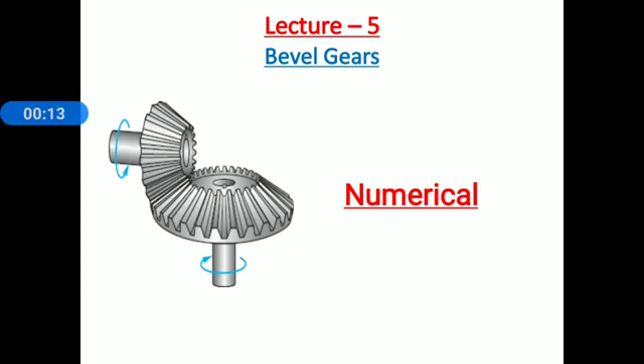This is the fifth lecture on bevel gears. In this lecture, we solve numericals. Let me start. This is the problem statement. Everyone carefully read this problem statement and try to collect given data.

A pair of bevel gears with 20-degree pressure angle consists of a 20 teeth pinion meshing with a 30 teeth gear. The module is 4 mm while the face width is 20 mm. The material for the pinion and gear is steel 50C4, SUT 660 Newton per millimeter square.

The gears are machined to meet the specification of grade 8 and the surface hardness is 400 BHN. The pinion rotates at 500 rpm and receives power from the electric motor. The starting torque of the motor is 150% of the rated torque. Assuming a minimum factor of safety as 2, determine the rated power that the gear can transmit.

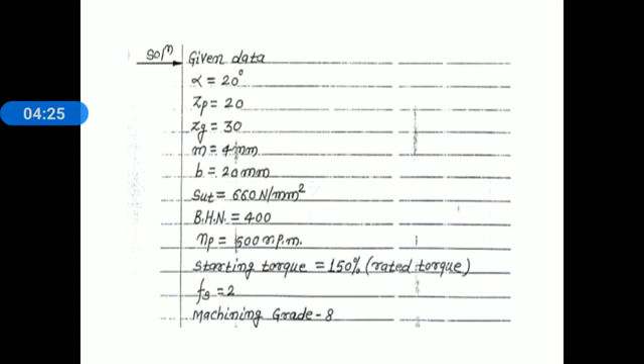When we solve a problem on a spur, helical and bevel gear, the first step is deciding the weaker between pinion and gear. If the material is the same for pinion and gear, the pinion should be weaker, and if the materials are different, we take the product of bending stress and Lewis form factor for pinion and gear, and the lower value is considered as weaker.

In this case both pinion and gear are made of steel 50C4. The material is the same, therefore the pinion should be weaker. After deciding the weaker, in step one we do the raw calculation needed in the next step. We find the pitch angle gamma for the pinion: tan gamma is equal to Zp divided by Zg, 20 divided by 30. Taking tan inverse of this ratio, gamma is equal to 33.69 degree.

Virtual number of teeth on pinion. The relation for virtual number of teeth on a bevel gear is Z' = Z / cos gamma. Applied to the pinion, Z'p = Zp / cos gamma. Substituting, 20 divided by cos 33.69, and we get a virtual number of teeth of 24.0369. Now we need to find the Lewis form factor for virtual number of teeth.

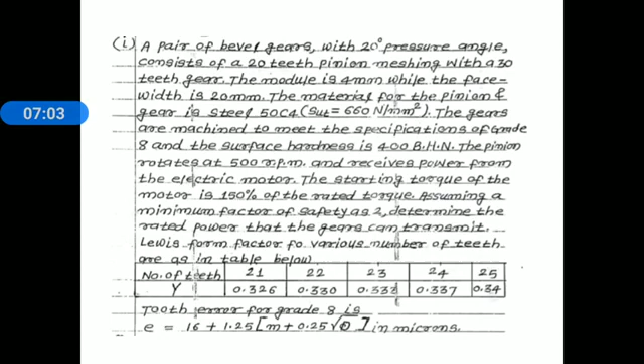Now here we do the interpolation to get the Lewis form factor for virtual number of teeth 24.0369. Y is equal to y1 plus (y2 minus y1) into (x minus x1) divided by (x2 minus x1). Now substitute the values. y1 0.337 plus y2 minus y1, y2 0.34 minus 0.337, into x minus x1, x 24.0369 minus 24, 24 is the value of x1, whole divided by x2 minus x1. x2 is 25 minus x1, 24.

Simplify that and we get a value of virtual number of teeth. Sorry, we get a value of Lewis form factor for virtual number of teeth. Y is equal to 0.33711.

Bending stress sigma b. We know how to find out the bending stress. Sigma b is equal to SUT by 3. We know the value of SUT, 660 divided by 3, and we get a bending stress of 220 Newton per millimeter square. After that, pitch circle diameter of pinion and gear.

Pitch circle diameter of bevel pinion, capital D suffix p is equal to m into Z suffix p. m 4 into Zp 20. We get a pitch circle diameter for bevel pinion of 80 millimeter. Similarly, pitch circle diameter of bevel gear capital D suffix G is equal to m into Z suffix G, 4 into 30, and we get the pitch circle diameter of bevel gear capital D suffix G is equal to 120 millimeter.

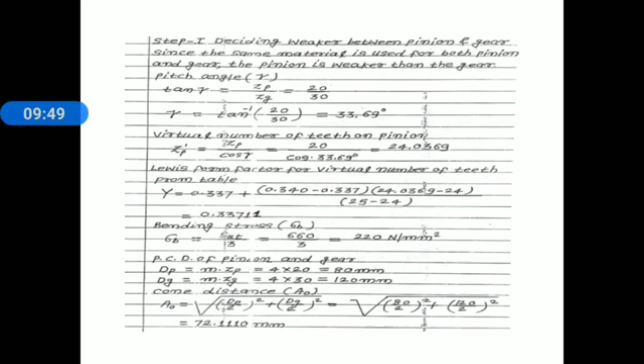Okay, now here we find out the power. For finding the power, we decide the criteria, either bending stress or wear stress. That's why we need to find out the bending strength and wear strength. Now the next step is step number second, beam strength, SB. We know the relation for bending strength in case of a bevel gear.

SB is equal to m b sigma b into Y into, inside the bracket, 1 minus b divided by AO. We know all the values, substitute all these values in that relation, and we get the beam strength. Module m 4 into face width 20 into 220 into 0.33711 into, inside the bracket, 1 minus 20 divided by 72.1110. Simplify that and we get a value of bending strength. SB is equal to 4287.5795 Newton.

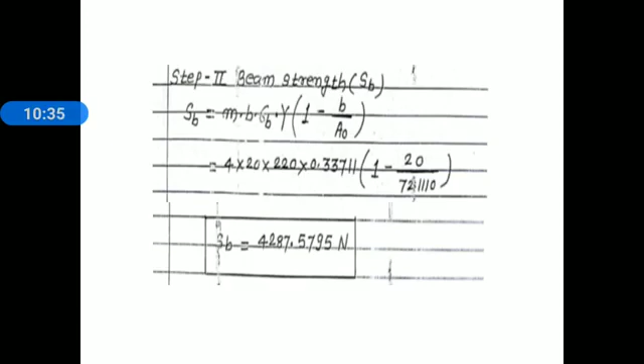Step number third, wear strength. We know the relation for wear strength in case of a bevel gear. SW is equal to 0.75 b Q capital D suffix P into K divided by cos gamma. Okay, now here in that relation only two terms are unknown, Q and K. Q is the ratio factor and K is the material constant.

Now the ratio factor Q in case of a bevel gear is obtained by using the relation Q is equal to 2Zg divided by Zg plus Zp into tan gamma. Now we know all the values, substitute all these values in that relation and we get the ratio factor Q. 2 into 30 divided by 30 plus 20 into tan 33.69 degree. Simplify that and we get a value of the ratio factor Q.

Q is equal to 1.3846. Material constant K: we know the relation for material constant when both the gears are made of steel with a pressure angle of 20 degrees. K is equal to 0.16 into (BHN divided by 100) squared, that is 0.16 into (400 divided by 100) squared. Simplifying, we get a value of 2.56 Newton per millimeter square.

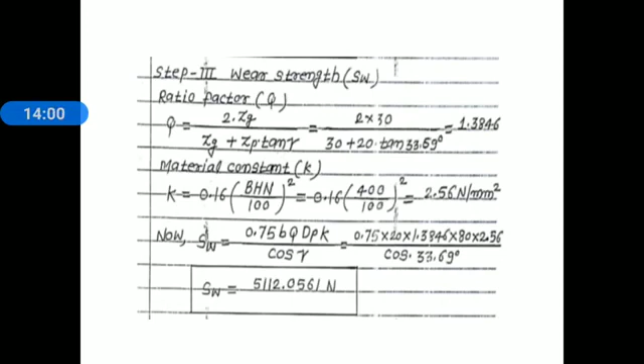But in this problem it is not mentioned to use Spott's equation or Buckingham's equation. If specifically mentioned, use that particular equation to get the value of dynamic load. Since it is not mentioned, here we use Spott's equation to get the value of dynamic load. Step number 4, dynamic load by Spott's equation.

Everyone knows the relation of Spott's equation in the case of a bevel gear. For determining the dynamic load, we first need the error, total error, and mean radius of pinion and gear. We know the error e is equal to 16 plus 1.25 into (module plus 0.25 under root 2R). R is the mean radius, remember that.

For finding the error in pinion, we need the mean radius of pinion, and for the error in gear, the mean radius of gear. So first we find the mean radius of pinion, R1. R1 is equal to Dp by 2 minus b sine gamma divided by 2. Substitute the values: 80 by 2 minus 20 into sine 33.69 degrees divided by 2.

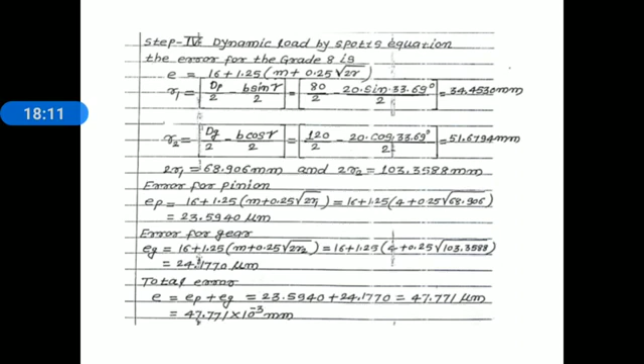After getting the error in microns, it must be converted into millimeters by multiplying by 10 to the power minus 3, or dividing by 1000. So here, 47.771 into 10 to the power minus 3 millimeters. After getting the mean radius of pinion and gear and the total error, we use Spott's equation to get the value of dynamic load.

Before that, we find another dimension, b dash. B dash is the axial width of the gear blank. We know the relation: b dash is equal to b cos gamma. B is 20, cos 33.69, and we get b dash equal to 16.6410 millimeters. Now we have r1, r2, e and b dash. After getting these values, we use Spott's equation to get the dynamic load.

Dynamic load P suffix D, according to Spott's equation, is equal to e into speed of pinion into number of teeth on pinion into b dash into R1 into R2, whole divided by 2530 into under root R1 square plus R2 square. We know all the values, so substitute them in this relation to get the dynamic load.

Error 47.771 into 10 to the power minus 3, speed 500 rpm, ZP 20, b dash 16.6410, R1 34.4530, R2 51.6794, whole divided by 2530 into under root 34.4530 square plus 51.6794 square. After simplification we get the dynamic load P suffix D equal to 90.0740 Newton.

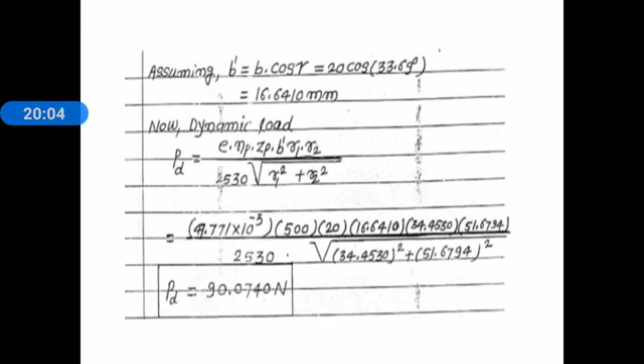Now the last step, step number 5, rated power. Since the beam strength is lower than the wear strength, beam bending failure is the criterion of design. We know the relation for effective load: effective load is equal to service factor into tangential force plus dynamic load. And beam strength SB is equal to effective load into factor of safety.

So SB is equal to effective load into factor of safety, where effective load is CS into PT plus dynamic load. Here we know all the values; only tangential force is unknown. Substitute all the values.

Beam strength 4287.5795 is equal to service factor 1.5 into tangential force PT plus dynamic load 90.0740, into factor of safety 2. Simplify and we get tangential force PT equal to 1369.1438 Newton. Now the general relation for power is 2 pi N T divided by 60. Speed is known; only torque is unknown, and after getting the tangential force we can easily find the torque.